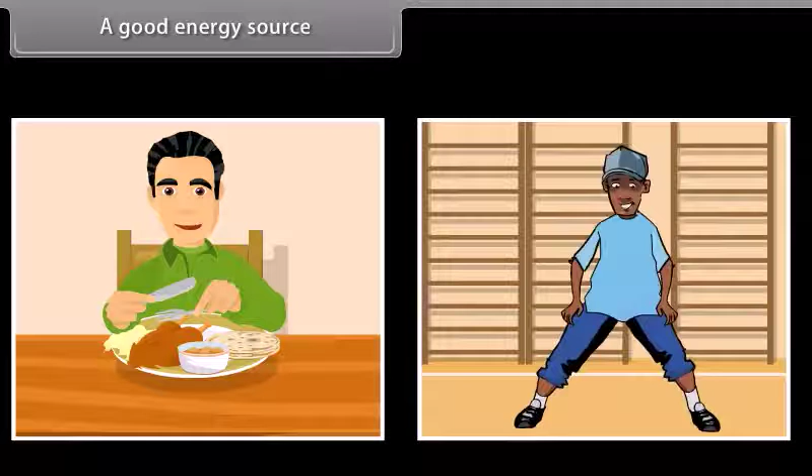A good energy source. In your day-to-day life, you need a lot of energy throughout the day. All physical activities that you perform require energy. This energy comes from a source that gives you the required energy to perform any activity. A good energy source must assist you in performing a large volume of work, be easily available, be easy to store and move from one location to another, and be affordable.

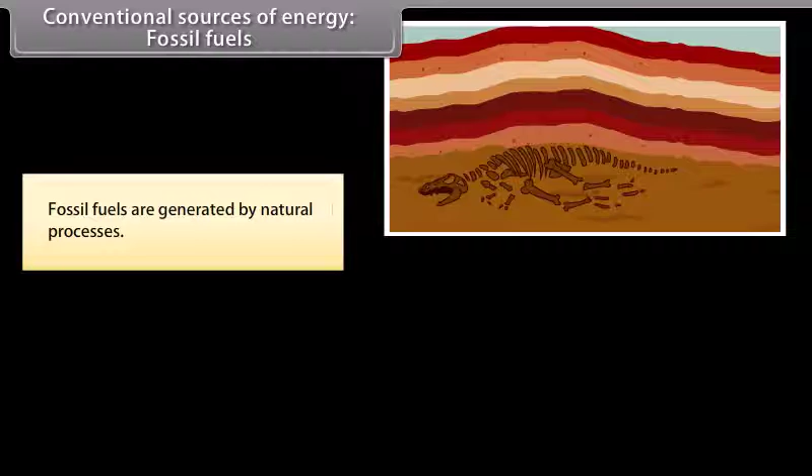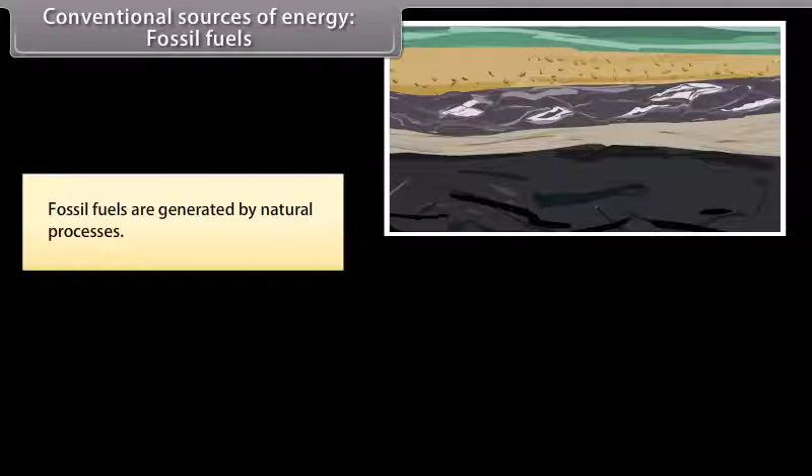Conventional sources of energy: fossil fuels. Fossil fuels are generated by natural processes. They include a high percentage of carbon. These are non-renewable sources of energy as they take millions of years to form. The reserves of these fuels are reducing at an alarming rate. The types of fossil fuels are coal, petroleum, natural gas, and heavy crude oil.

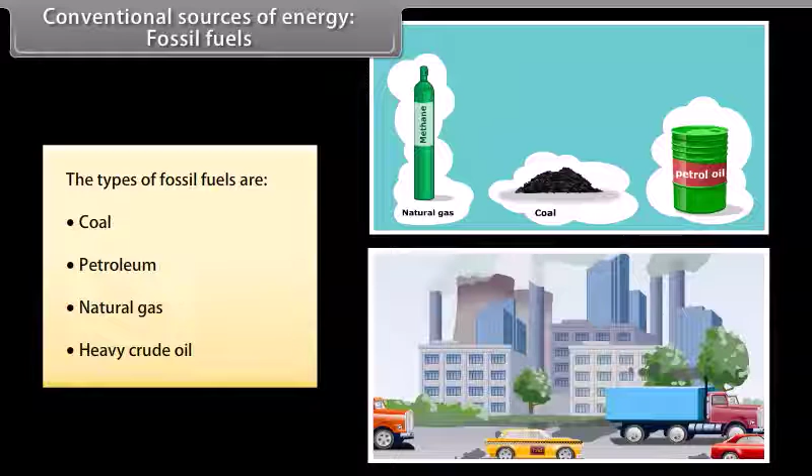Conventional sources of energy: thermal power plants. A thermal power plant is an industry where the prime mover is driven by steam. Water is heated and then turned into steam. This in turn spins a steam turbine, driving an electrical generator. After it passes through the turbine, the steam is condensed in a condenser and recycled to where it was heated.

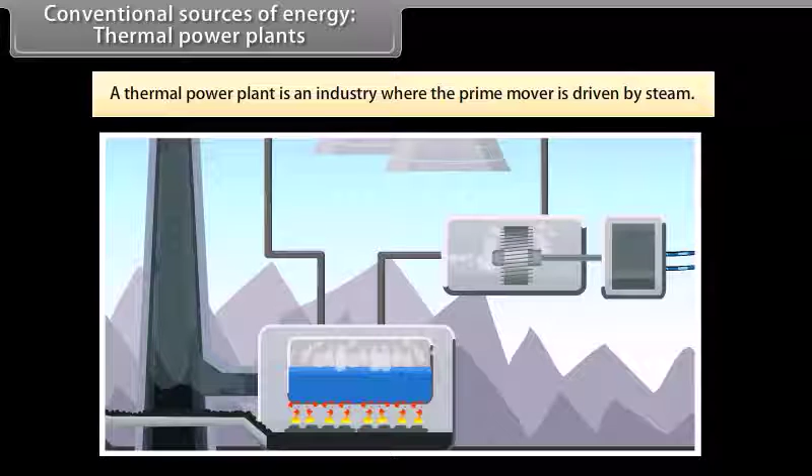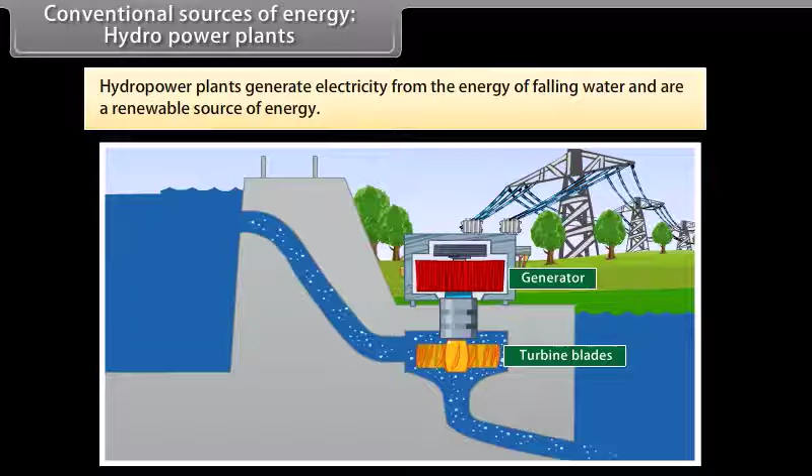Conventional sources of energy: hydropower plants. Hydropower plants generate electricity from the energy of falling water. Hydropower is a renewable source of energy. The advantages of hydroelectricity are: the cost of hydroelectricity is low, hydroelectric power supply is most suitable for industrial applications, and no carbon dioxide is produced as no fossil fuels are burnt.

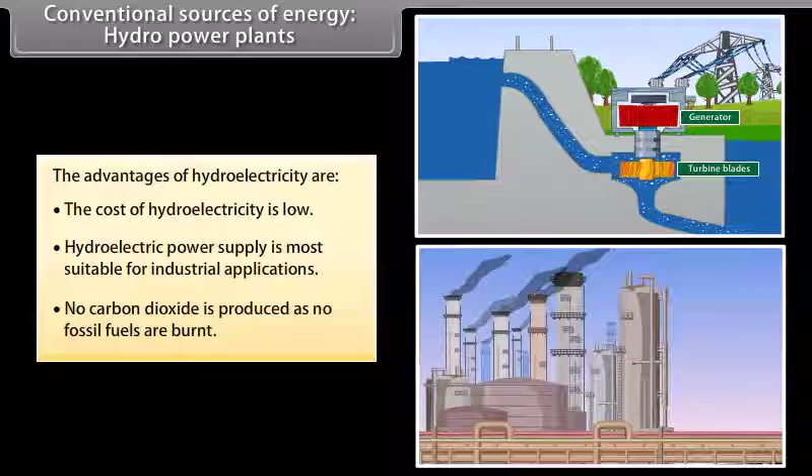Did you know? Burning fossil fuels generates around 21.3 billion tons (21.3 gigatons) of carbon dioxide, CO2, per year. Natural processes can only absorb about half of that amount. As you can see, there is a net increase of 10.65 billion tons of atmospheric carbon dioxide per year.

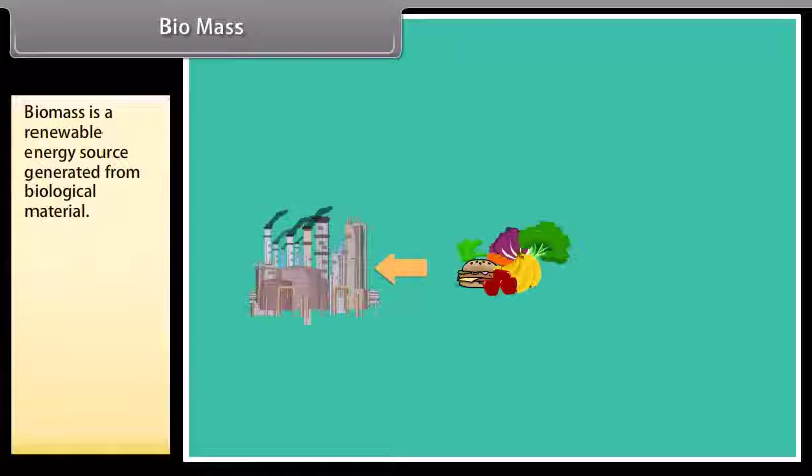Biomass. Biomass is a renewable energy source generated from biological material derived from living or recently living organisms. As an energy source, it is either used directly or converted into other energy products such as biofuel. For example, forest residues such as dead trees, branches and tree stumps, yard clippings, wood chips and even municipal solid waste. Biomass also includes plant or animal matter that can be converted into fibers or other industrial chemicals.

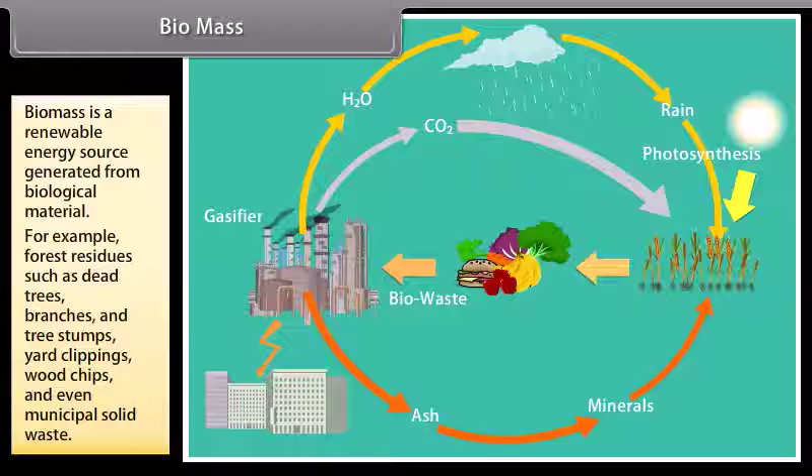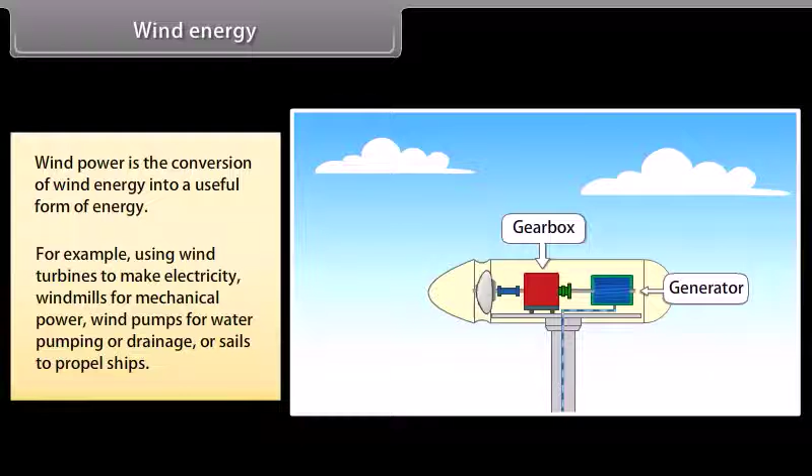Wind energy. Wind power is the conversion of wind energy into a useful form of energy, using wind turbines to make electricity, windmills for mechanical power, wind pumps for water pumping or drainage, or sails to propel ships. A large wind farm consists of several hundred individual wind turbines connected to the electric power transmission network.

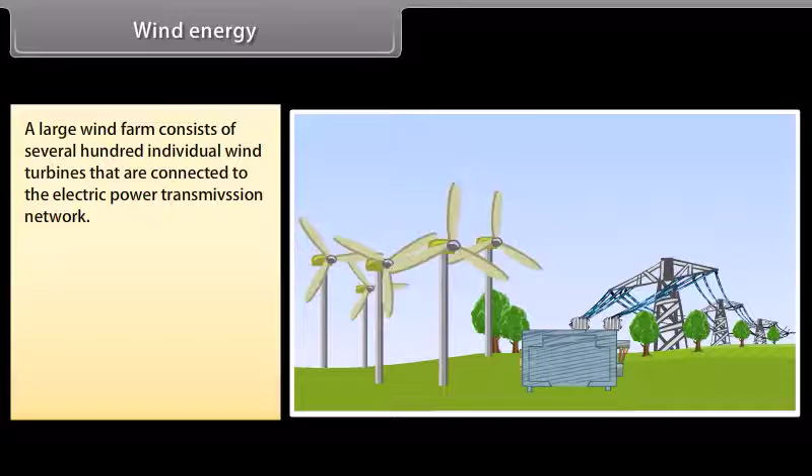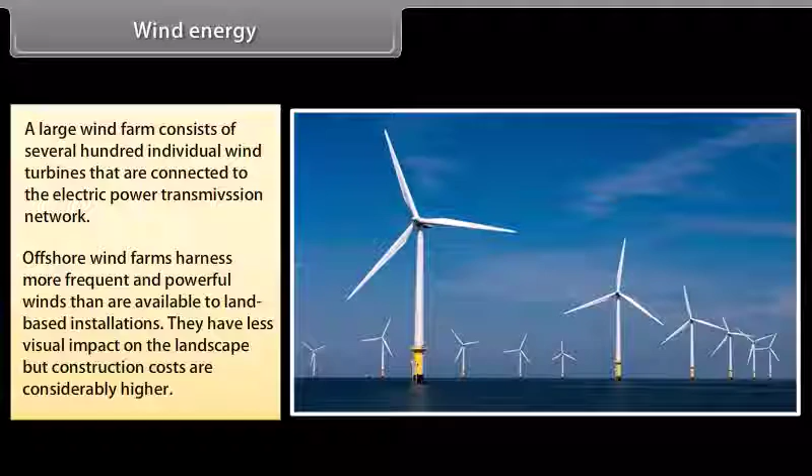Offshore wind farms harness more frequent and powerful winds than are available to land-based installations. They have less visual impact on the landscape, but construction costs are considerably higher. Small onshore wind facilities provide electricity to isolated locations, and utility companies increasingly buy back surplus electricity produced by small domestic wind turbines.

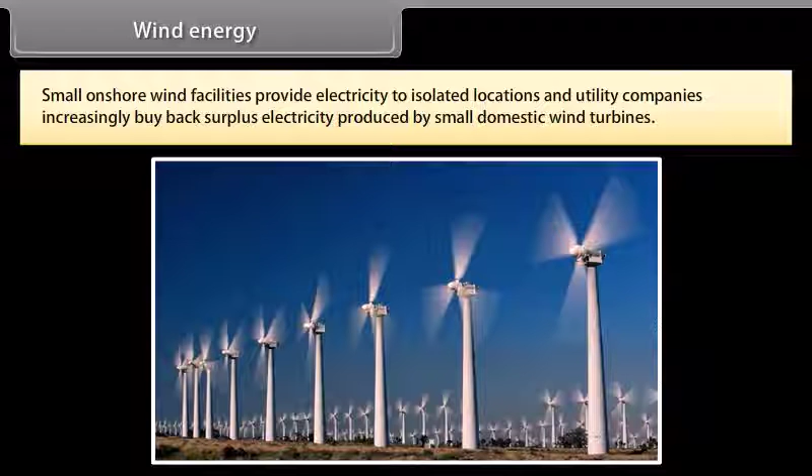Did you know? All large wind turbines have the same design: a horizontal axis wind turbine with an upwind rotor with 3 blades, attached to a nacelle on top of a tall tubular tower. In a wind farm, individual turbines are interconnected with a medium voltage power collection system and communications network. At a substation, this medium voltage electric current is increased in voltage with a transformer for connecting to the high voltage electric power transmission system.

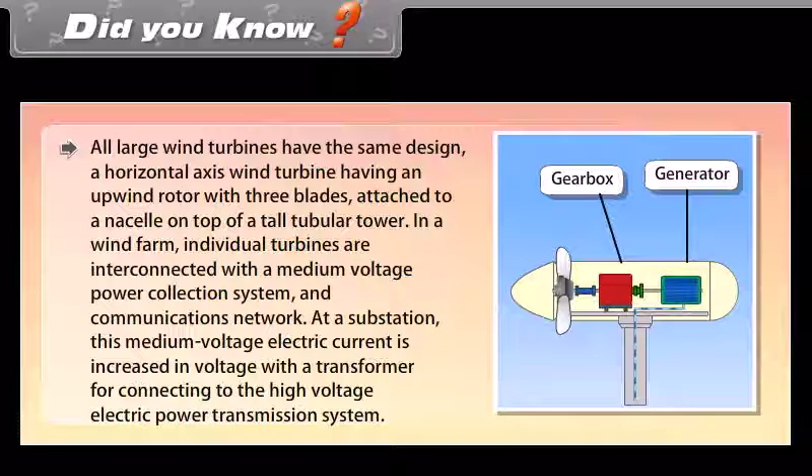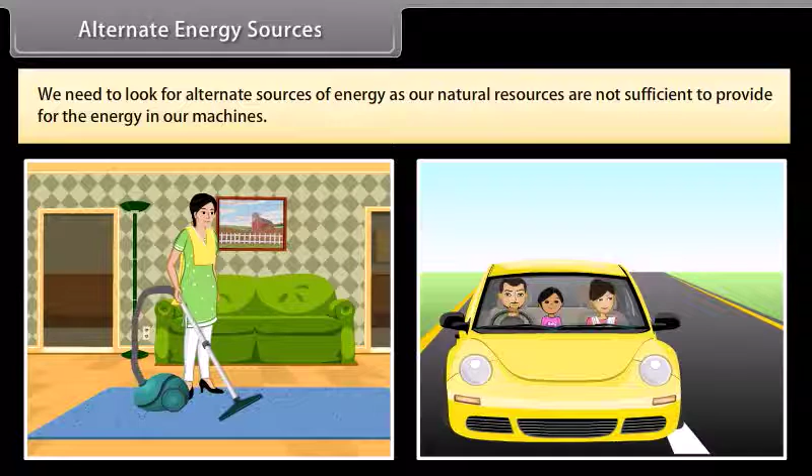Alternate energy sources. As we progressed, our day-to-day life activities also changed. We now get most of our work done by machines. Due to this, we need to look for alternate sources of energy, as our natural resources are not sufficient to provide for the energy in our machines. Examples include solar energy, energy from the sea, geothermal energy, and nuclear energy.

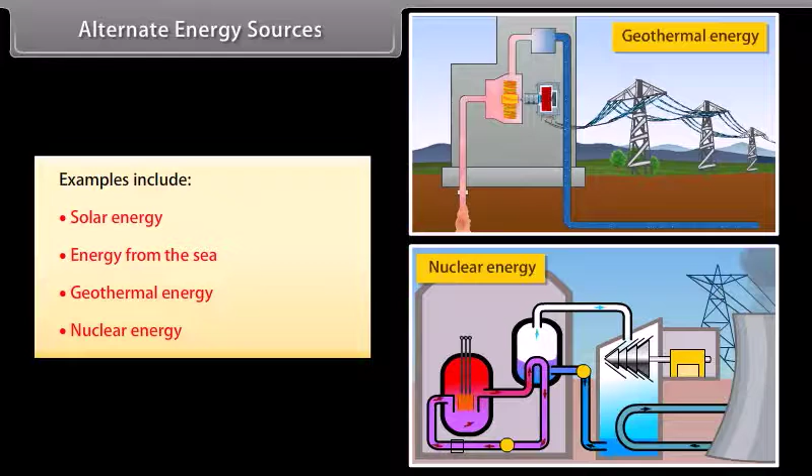Solar energy. Solar energy is derived from the radiant light and heat of the sun. It has been used by humans since ancient times for a range of technologies. Solar energy is used for architecture and urban buildings.

Solar energy is also used for heating water in our day-to-day life, where solar hot water systems use sunlight to heat water. In low geographical latitudes, domestic hot water usage is provided for with temperatures up to 60 degrees Celsius by solar heating systems.

The most common types of solar water heaters are evacuated tube collectors and glazed flat plate collectors, generally used for domestic hot water, and unglazed plastic collectors used mainly to heat swimming pools.

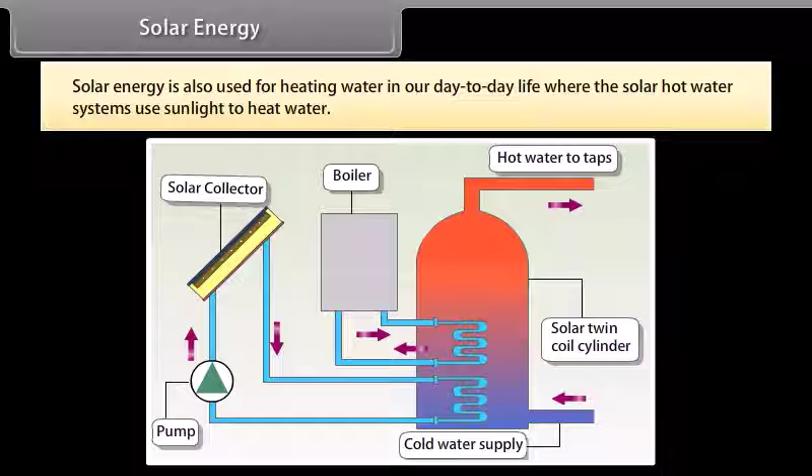Energy from the sea: tidal energy. Tidal energy is a form of hydropower that converts the energy of tides into electricity. This is a renewable source of energy, extracted from the oceanic tides.

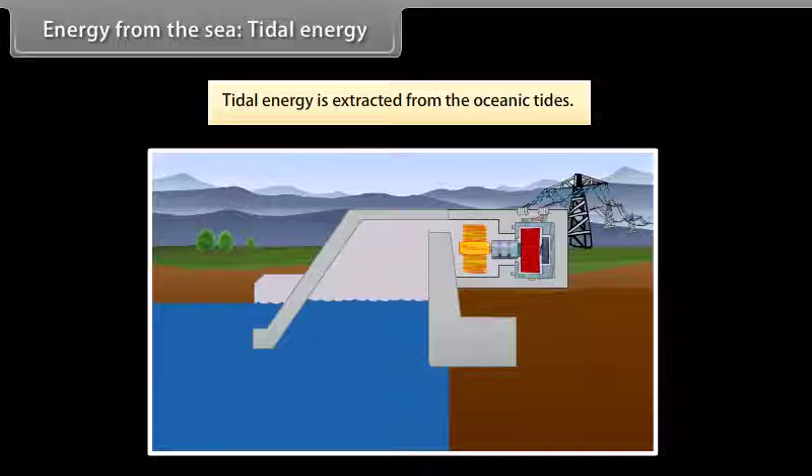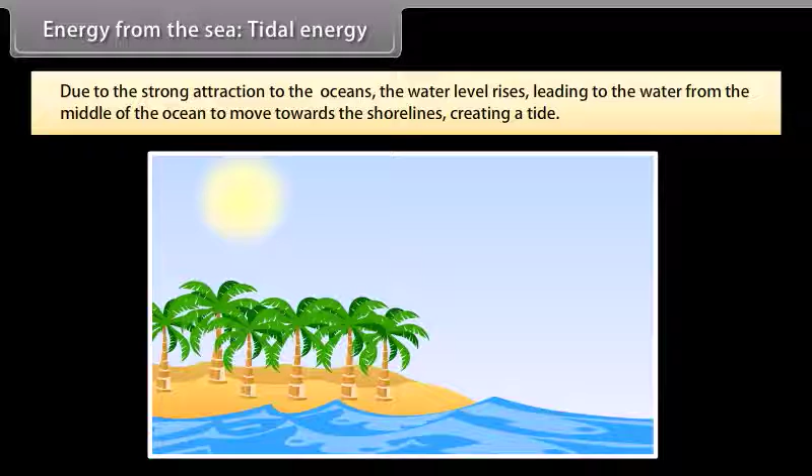Tidal forces are periodic variations in gravitational attraction exerted by the moon. This force creates motions or currents in the oceans. Due to the strong attraction, the water level rises, leading the water from the middle of the ocean to move towards the shorelines, creating a tide. This is an unfailing occurrence due to the consistent pattern of the moon's orbit around the Earth.

The energy generated by the tide is saved by constructing a dam on a narrow opening to the sea. A turbine is then fixed at the opening of the dam that converts this tidal energy to electricity.

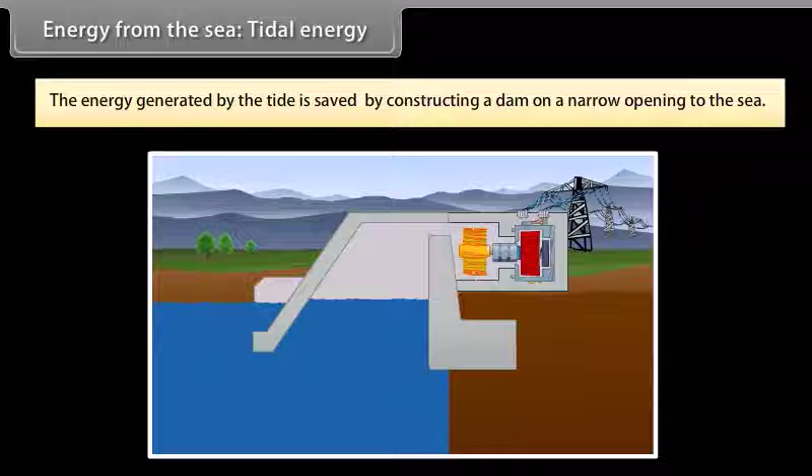Energy from the sea: wave energy. Wave energy is the movement of energy by oceanic waves. We can capture this energy to do useful work, for example electricity generation, water desalination, or the pumping of water into reservoirs. Waves are generated by wind passing over the surface of the ocean.

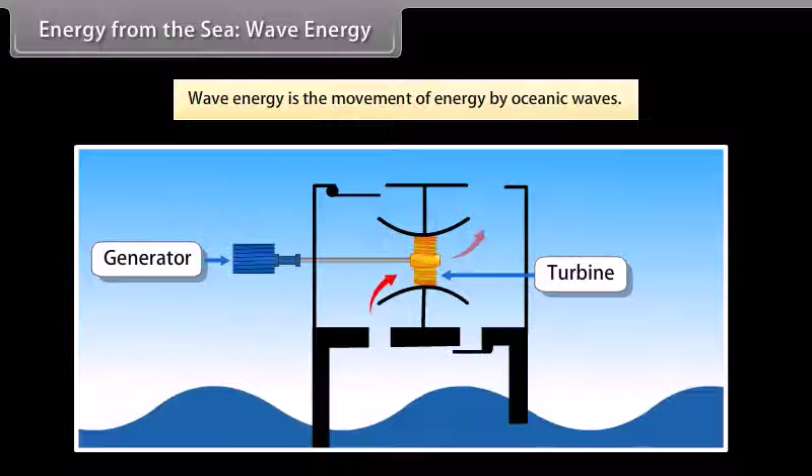As long as the waves move slower than the wind speed above them, there is an energy transfer from the wind to the waves. Both air pressure differences between the upwind and the wave crest, as well as friction on the water surface by the wind, make the water undergo shear stress that causes the growth of the waves and in turn helps in generating wave energy.

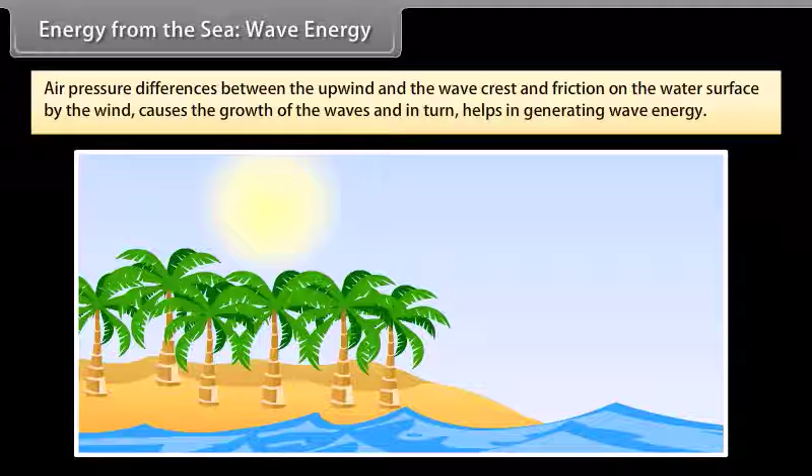Energy from the sea: ocean thermal energy. Ocean thermal energy uses the temperature difference between cooler deep surface and warmer shallow surface ocean waters to run a heat engine and produce a useful form of energy, mainly electricity.

Once the surface water is sufficiently warm, it is used to boil volatile liquid ammonia. The vapors of ammonia are then used to run a turbine. The cold water is then pumped from the depths of the ocean and used to condense the ammonia vapor back to liquid.

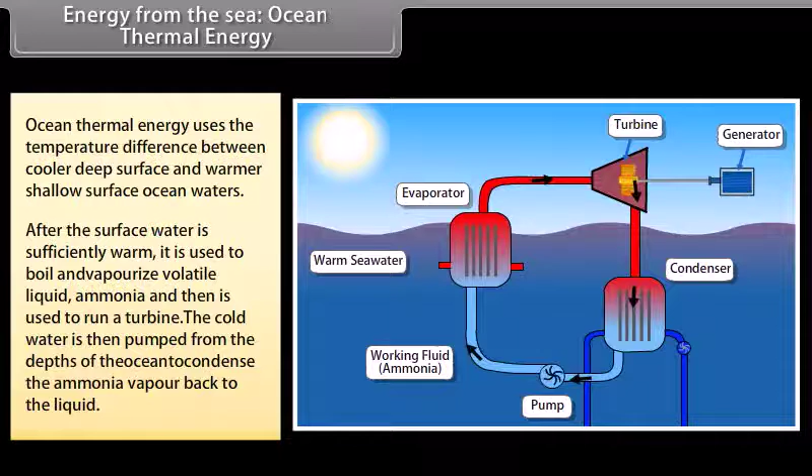Did you know? The Earth receives 174 petawatts of solar radiation at the upper atmosphere. Approximately 30% is reflected back to space, while the remaining 70% is absorbed by clouds, oceans, and land masses.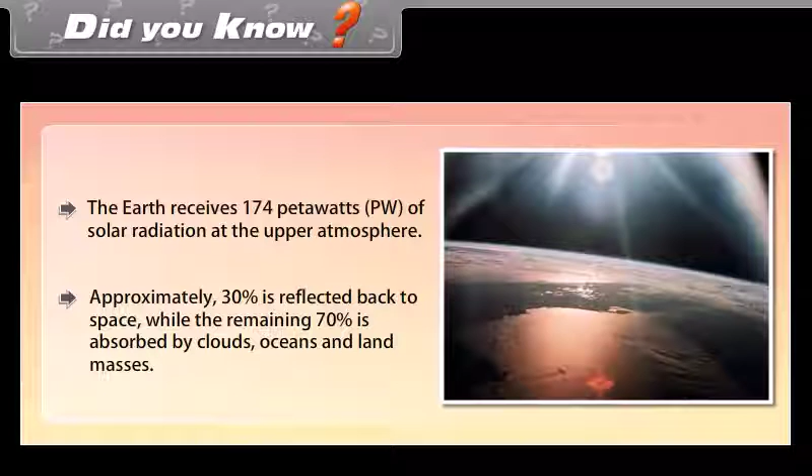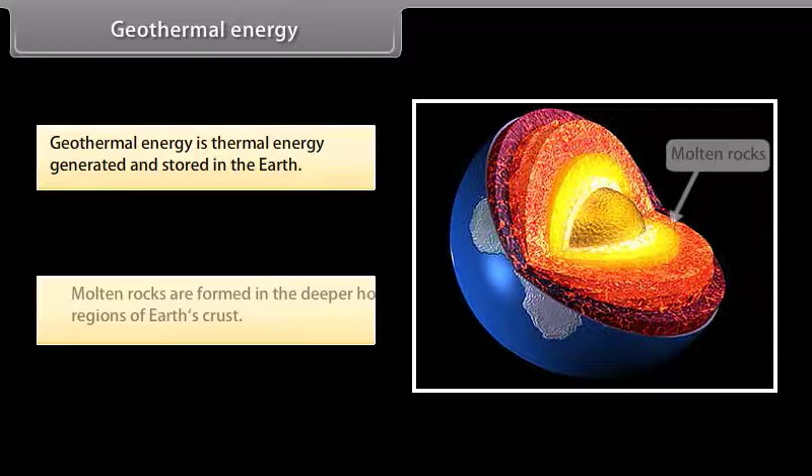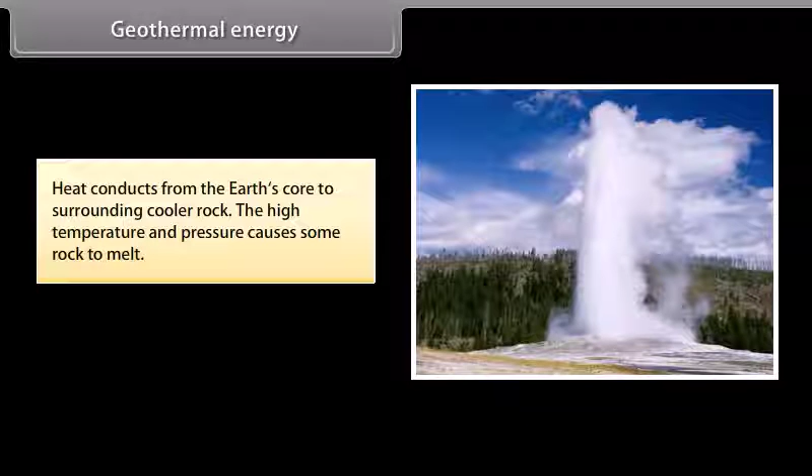Geothermal energy is thermal energy generated and stored in the earth. Molten rocks are formed in the deeper hot regions of Earth's crust. Heat conducts from the Earth's core to the surrounding cooler rock. The high temperature and pressure causes some rock to melt.

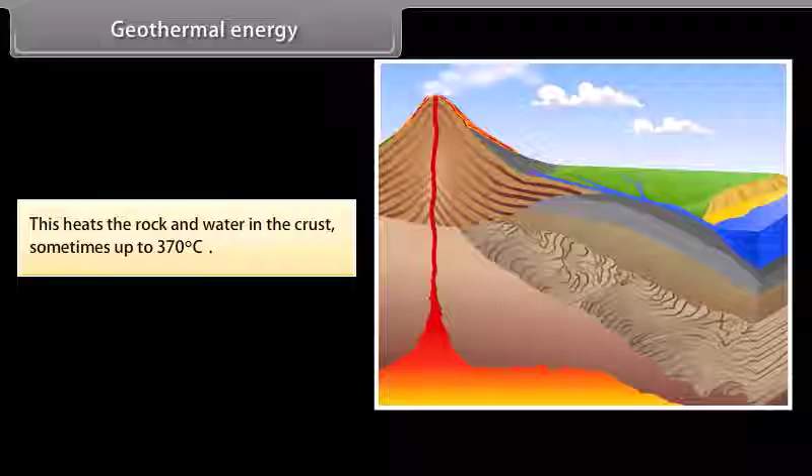This heats the rock and water in the crust, sometimes up to 370 degrees Celsius. Geothermal energy is used for hot springs and space heating.

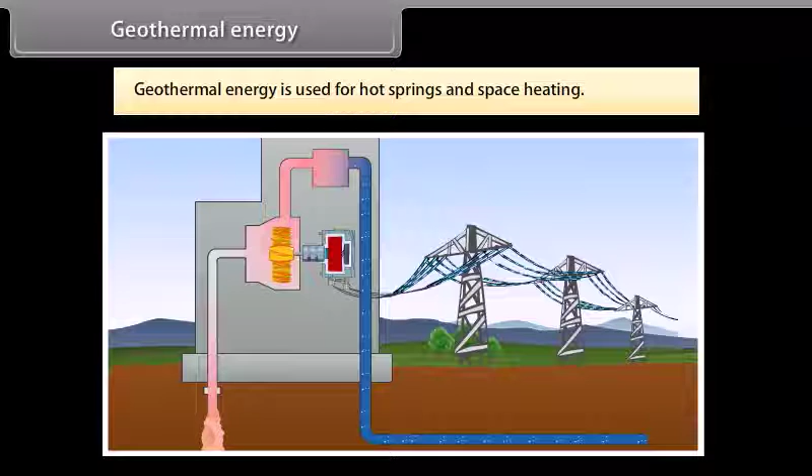Nuclear energy uses sustained nuclear fission to generate heat and electricity. It is a sustainable energy source that reduces carbon emissions. Nuclear energy is generated by a process called nuclear fission.

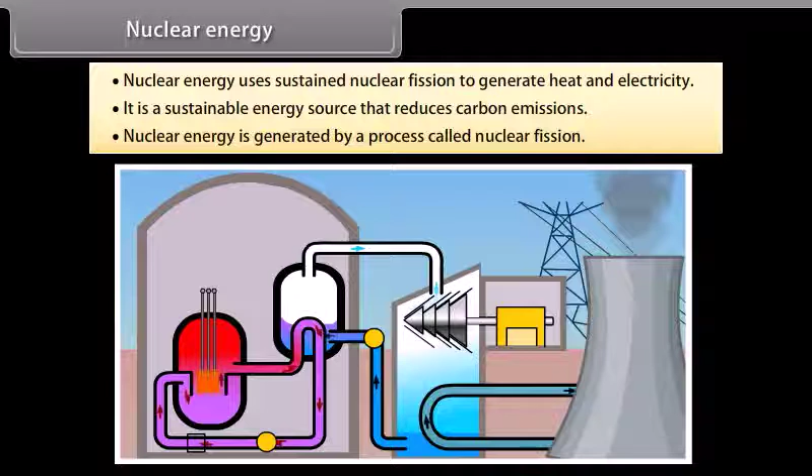In this process, the nucleus of heavy uranium, plutonium, or thorium is bombarded with low-energy neutrons. This atom is then split into lighter nuclei, and a tremendous amount of energy is released. For example, the fission of an atom of uranium produces 10 million times the energy produced by the combustion of an atom of carbon from coal.

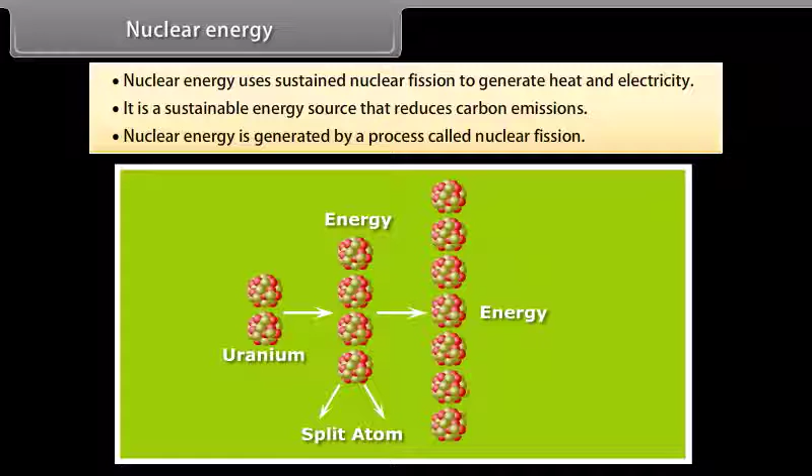Environmental consequences: using any source of energy affects the environment around us. Therefore, before exploiting any energy source, ensure that it does not disturb the environmental balance and is harnessed judiciously.

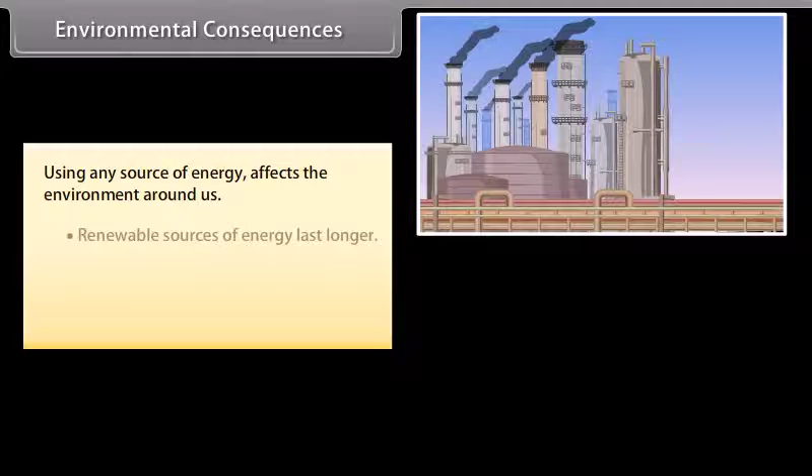Renewable sources of energy last for as long as they keep generating, whereas non-renewable energy runs out. We have to be judicious in our selection of energy, the purpose of the energy being used, and the actual usage of the energy.

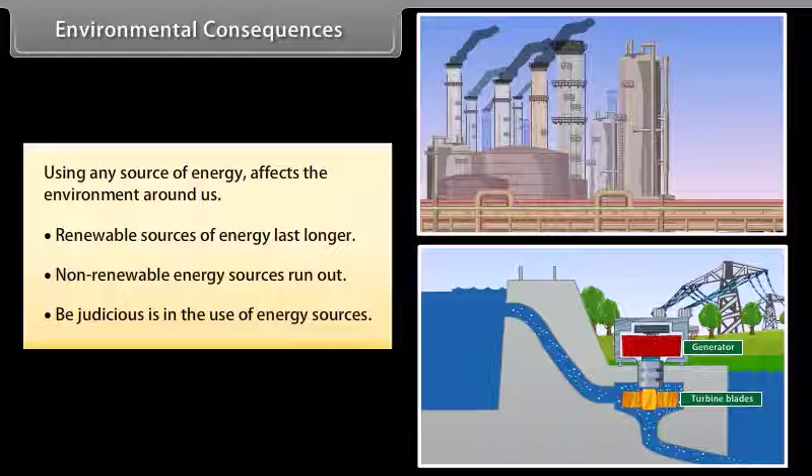Summary. Let us summarize what we have learnt.

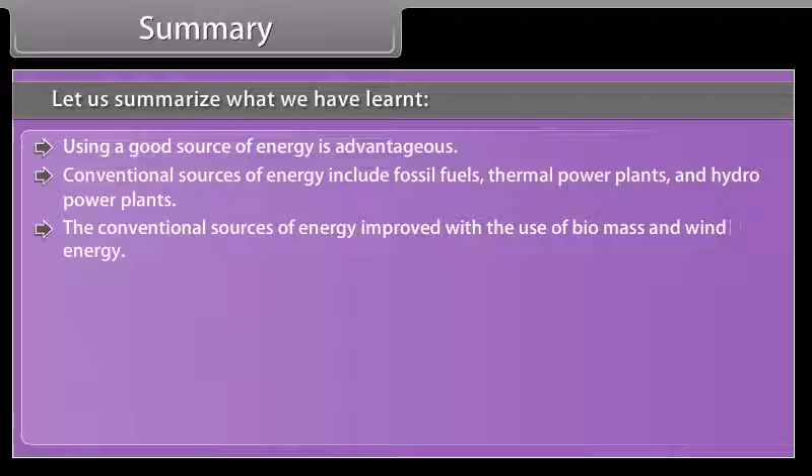Using a good source of energy is advantageous. Conventional sources of energy include fossil fuels, thermal power plants, and hydropower plants. The conventional sources of energy improved with the use of biomass and wind energy. Solar energy, energy from the sea, geothermal energy, and nuclear energy are all alternate sources of energy.

Renewable sources of energy last for as long as they keep generating, whereas non-renewable energy runs out. We have to be judicious in our selection of energy, the purpose of the energy being used, and the actual usage of the energy, so as to avoid affecting the environment around us.